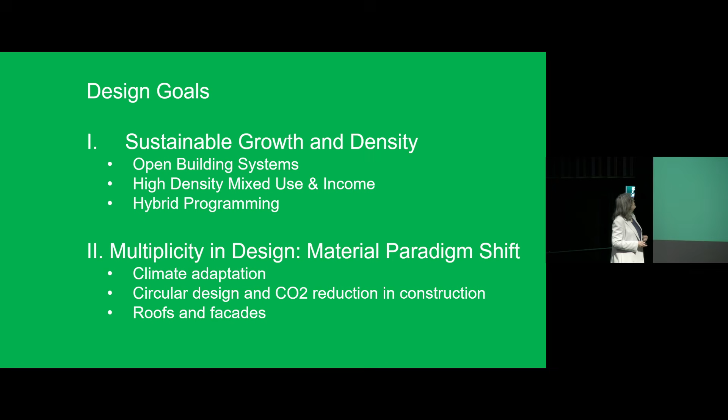When I thought about how to give this lecture, I also have to see what I'm actually talking about. So I hope I have to stay a bit here and see the image as well. I like to make this kind of little bullet point list.

In the beginning of our office, we talked a lot about sustainable growth and density, and how we can play a role in that with our architecture. It was already dealing a lot with numbers and systems, trying to prove that within the same systems, data and parameters, we could do things differently and have a joyful life again as architects, not just following prototypes and economic models. Then we see a shift, which roughly happened about 10 years ago, which also influenced us a lot. So the second part of my talk will be about what it did to the projects we were making after that.

I think one of the most important things for our office, which really started us, is how do we build and how do we densify? Because we knew 30-something years ago when we started our office that we had to deal with this growth and find agreeable ways of densification. And we tried to prove that as much as possible.

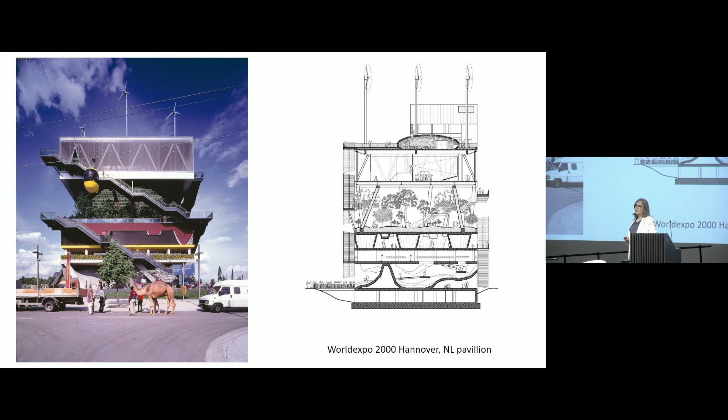It led in the year 2000 to this pavilion for the Netherlands, in which we believed in densifying, we believed in cities, but we also believed we could optimize the use of our lands and buildings much more. So the Netherlands rented a huge plot to build a really huge pavilion at our neighboring, most important economic partner Germany's World Exhibition. And we said, well, we want to prove that we do not use so much land anymore.

We can pile up the land. So we chopped the land into as many floors as this building has—it's actually a representation of the area of the exhibition site of the Dutch pavilion. We put it on top of each other and tried to show it as a kind of cycle, where we said we can raise energy with our buildings, we can collect the water, then the water can come down, and we could start to create forests on the 5th floor, and green our roofs.

Then it can trickle down, and we can recycle the water even further and fertilize our agriculture—there were pots and plants down there, it's even literally showcased here. And then we clean the water we have used again, and it gets pumped up again, and we recycle it again.

Vertical landscapes, just to represent to ourselves that our sprawling country, our ever growing amount of agriculture, but at the same time this demand for more housing and more other activities—it had to find a way, a place. And maybe if we hybridize that, put it together, integrate it with each other, we could do that and wouldn't have battles for area, land and livability. It could be done at the same time, maybe even in our cities and not just on the outside.

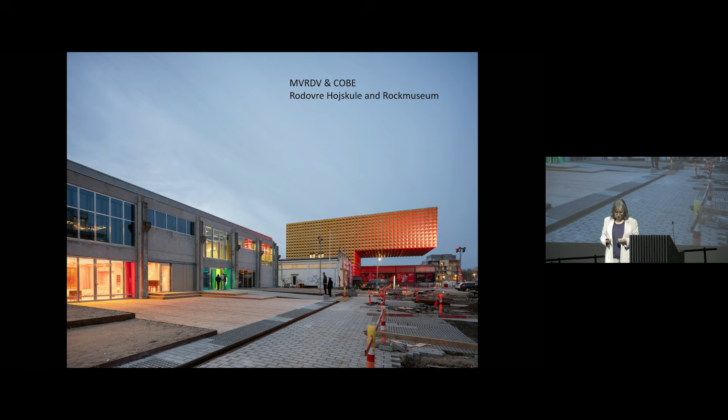And I also call it an open structure, because we also show that you can put all kinds of different things on top of each other if you think about flexible, open and exciting structures. And that is something that most of you who are designing also know already, from when you start to reuse existing buildings, like warehouses, and in this case an old cement factory.

If you do that in a way that you get infills, in a kind of Stewart Brand kind of way, you can also do it in a flexible way, an affordable way, and a way that can be transformed again. So this is learning from renovating, but maybe this open building structure is also one of the ways to go ahead, to make big floors, a way of building that is efficient, that you can reuse again, reimagine again, and find architectural elements and aspects.

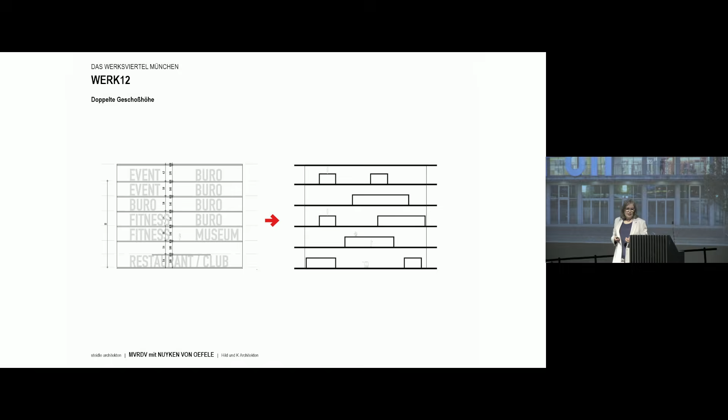It's sometimes mostly interiors, floor heights, infills as we used it, and then they could be fun. In this building in Munich, we even freed up the complete interior from the core, the staircases and the elevators, and put that all on the outside of the building, just to prove that we can have super open and flexible structures.

And then the elements you put in there give the life and the atmosphere and the special feeling to the building, give character to the building as well. And this artist even embraced that by using this sort of comic book, you know, Donald Duck says 'ooh' and 'ah', and he put that all around the building. Wow, which is a great art piece, of course.

So how to make architecture attractive, even if it's in a sort of very bare state, you could say. What can you do to sell that actually and make that popular? And it worked, because it became building of the year in Germany. So Germans love this pop art architecture as well.

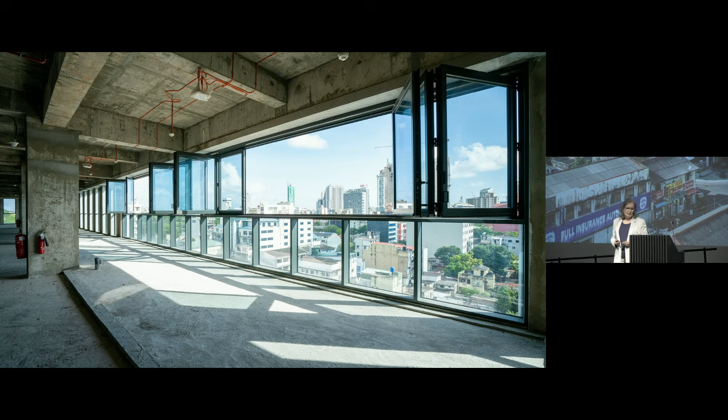So then you suddenly have to transplant your ideas to another culture, to another place. And when I talk about openness, I mean, we all know this is an office building, a commercial office building. That is, what is a commercial office building? It's floors, columns, roof, an interesting facade, and maybe a good lobby.

So there, we started to have the conversation about climate, and I said to him, well, Sri Lanka is famous for its verandas, let's get some openable parts in the building. Like, are you kidding? It's very hot here, I cannot lease these offices if they're not air conditioned. But I managed to mitigate that, and we compromised, and we also have verandas, enclosed parts in the building.

And the second thing that I came across, and in hindsight that was actually very good, he said, well, I want to make the car park above ground, it's much more expensive to make it underground. He made one layer underground, but there was also two upstairs.

And I said, well, cars, who needs cars? Nathalie, we're in Colombo, a lot of people here still have cars, so when I have an office building, I need parking space as well. And again, we agreed to create it, make it higher floors, and pretend on the outside it's already ready to become an office.

I believe that in the meantime, he has indeed already transformed one of these floors into office again. So this idea of the open structure and the open building, you can take it with you to many commissions. This transformability is sometimes something you have to discuss with your clients. But even in the simplest of buildings, it's an attitude.

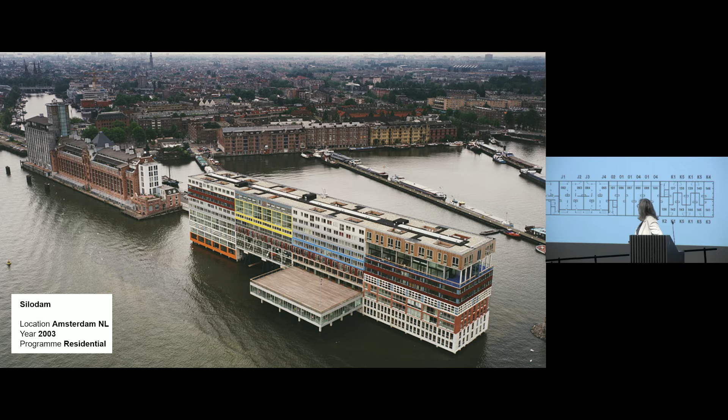Open structures also helped us solve another issue that's coming very contemporary again: mixed income, mixed use buildings for many different types of people with many different backgrounds. How can you do that? We imagined, okay, everybody needs their own type of house. Let's design a very clever structural system with only these walls and two shafts, and the rest can be filled in many different ways with many different floor plans. You can house people who rent an affordable apartment and people who have penthouses, all in the same building. This principle of playing with typology and looking for diversification, even with the same program, is something we continue to do.

We've continued this also in part conversion, part new buildings for housing in the Netherlands, with different types of incomes in one project. I like that a lot. There's a lot of discussion going on about that, and I think that's good. We need a society in which people live together, not segregated. In France, they still do this as well, another project.

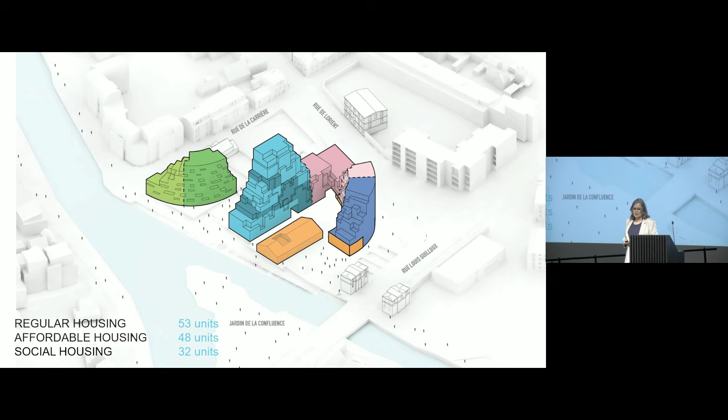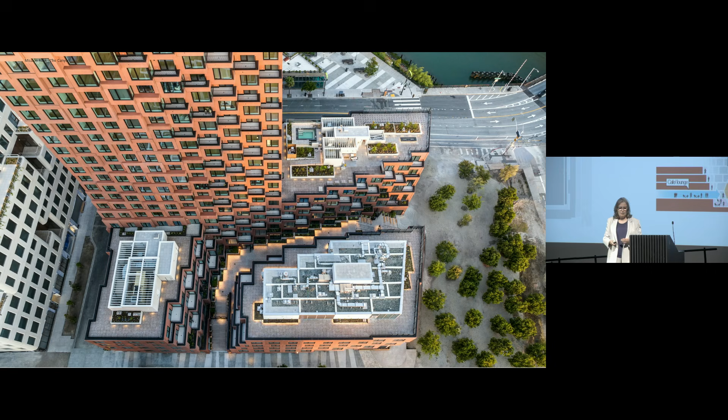And it continues. Now we did it in the States as well, in San Francisco, on a block where we also mix incomes again, including houses for affordables, the red one here. And mixed communities also, mixed use, not just housing, not just offices, but putting it all together, letting public space work, creating semi-public spaces, even if you build a lot of homes, making it accessible through shared facilities. All things we think are important to optimize.

We also see that our buildings start to become fatter, deeper and higher, so more. In the beginning of my career, I was still sort of in control of making a form, a shape, a building. Now I'm filling envelopes to the max, and it's just a bit of fighting back and finding openings.

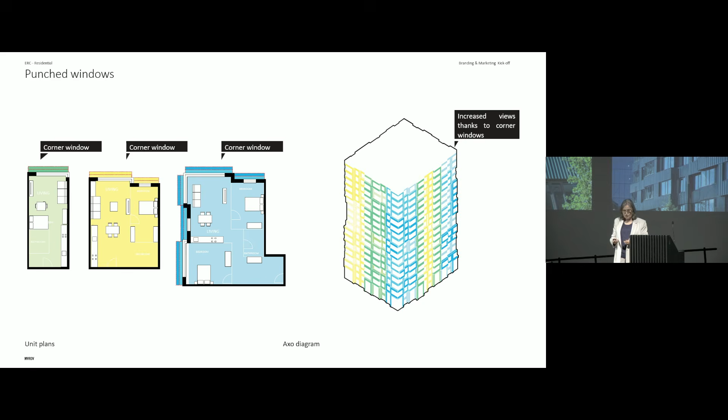But still, I think it's worth it if you can bring in more affordable homes. Here in Boston as well, this is a model with Tishman Speyer, working on an enterprise research campus on lands that belong to Harvard University. In the previous one, it was parking lots of the San Francisco Giants. So you see a societal interest in sustainable densification, socially sustainable densification, figuring out if in a massive form you can make these apartments more interesting by adding corners and edges and making the floor plans attractive. Right up to a recent project we won in New York, which I'm not allowed to show any images of yet. Same sort of half affordable, mid-income, and some more expensive apartments, adding it right into downtown Manhattan. It's happening, and you see city governments everywhere working on it.

Last thing from the early stages is hybridization of program. Now, I'm standing here at an architecture faculty, so I'm talking to you a little bit as if I'm speaking to students, since I'm also teaching at Technical University of Delft. This is also an important aspect. I'm actually teaching public building there, talking about public building, almost everything except housing. I think this is a very important aspect of contemporary buildings: how we deal with functions.

So monofunctionality, monofunctional types, for many different reasons, are more and more disappearing. I think that's also a good thing, because it means buildings can absorb more program, can be used longer, can contribute back to the city they're in. This is a definition I took from this book. So it's not mixed use—it's often confused with mixed use, like many different programs in one building.

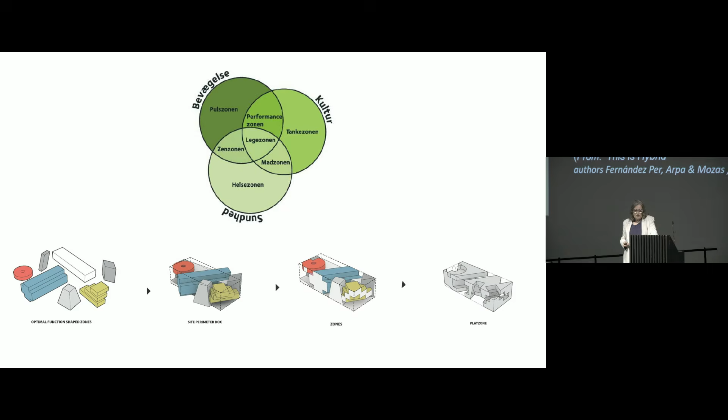No, we're really talking about overlapping functions, new spaces that emerge, things can happen that you might not know could happen. And I think that's an important aspect of contemporary building to take into consideration, especially for public buildings.

This is, for example, a neighborhood center we made in Copenhagen. The Danish said bevægelse, that's movement, kultur, that's obvious, and sundhed, which is health. We want to blend that in one building: healthy body, healthy mind, everything together. Can you make us a building in which all these things can happen, but you also merge and blend?

So we made, just a bit like with the housing, a building with many different rooms and spaces that could house different activities. But just as important as the rooms are also the spaces in between, so they're used for play and fun. As you can see here, there are some children hanging above the lobby. And the building is used day and night, and on the weekend, in different ways and for different groups and different people.

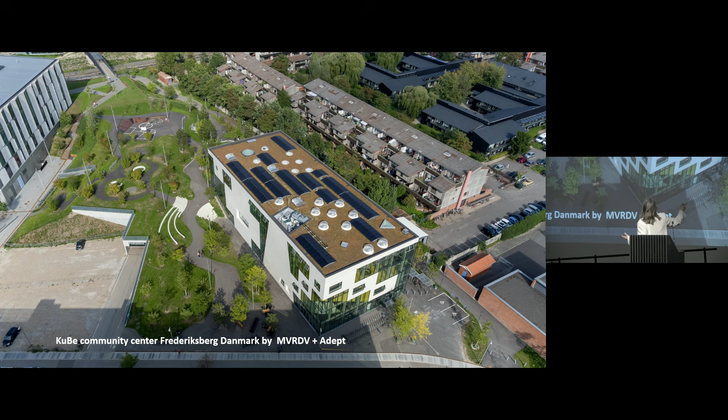It also relates back to the outside and the landscape. So this is a building in which there are a lot of spaces, but none of them are particularly determined. And putting different types of people with different financial backgrounds together in one building is important, especially for neighborhoods that are gentrifying with affordable and new homes. Cities like Copenhagen gentrify super rapidly, so people can see each other and meet and hang out in this building. Whenever you go there, during the day or night, weekend, winter or summer, different things can happen, and it puts all kinds of functions together. You can play there, do your startup office, eat, etc.

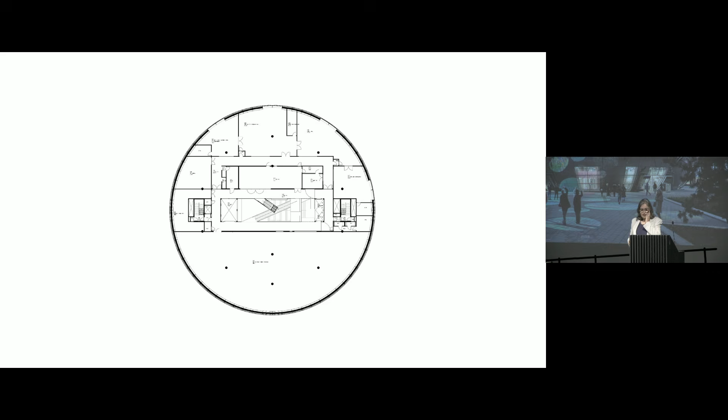Another hybrid is this depot building. It's a depot, but it's also a bit of a museum. In a very small space, in a vertical sense, you can walk through that building and look into the depots, and suddenly you create a situation of exhibition that also showcases what is happening. They are archiving, restoring, making temporary exhibitions. You see the whole culture of your city, in this case owned by the city of Rotterdam, stored in a huge depot, but it's also visible and accessible. Of course, we use the roofs as well.

A building we're going to make here in Toronto is the addition to the medical faculty, a new wing, together with Diamond Schmitt, Two Row Architects, and landscape architect Michael Van Valkenburgh. It's also something that represents a change in faculty and university buildings. Now, a medical faculty extension is quite particular—it has a lot of laboratory spaces, and arts and science spaces are in here as well. But we also wanted to add much more publicly accessible spaces at the lower levels, not just for us, but for the university as well.

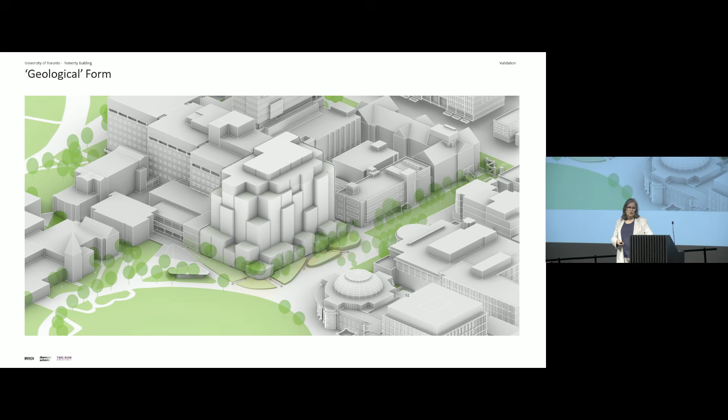University buildings—and it's super good to see this happening here tonight—you can expand the thinking about that. What if the plinth and the lower levels of university buildings stay accessible for students in the evening? Maybe events are happening there. That's a different use of the building than just standing there closed. Also in the daytime, I think students like to hang around more at universities, go to the libraries, don't want to stay in their rooms, want to meet each other, or be in a space where you're not tempted to use your phone all the time. Universities and schools are opening up.

So this is what we try to do here. That means we had big discussions with each other about the amount of accessible, semi-accessible, and semi-open areas. We learned from excursions in the Netherlands, and we know there are fantastic examples in Australia as well—there's a transformation of university buildings going on.

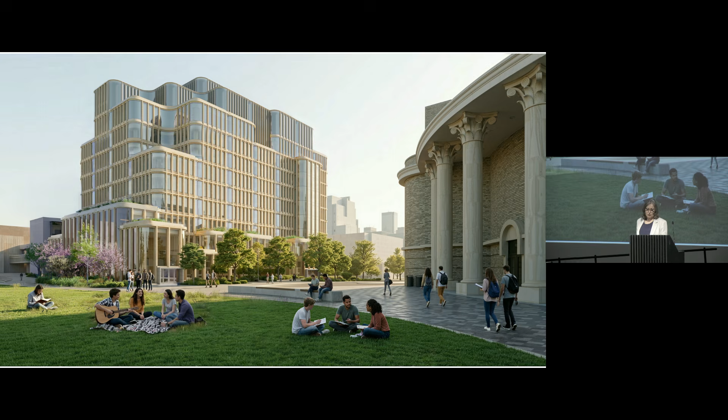In the Netherlands, probably not for medical faculties, but we don't even build single faculties anymore—we just build multi-user, multi-faculty buildings. It's also about efficiency of usage of spaces, but what is an architectural community? This definition is changing, and it will also be a place where the convocation takes place. It's also a space that we make in very close collaboration with Two Row Architects, to get the references there as well.

Which is also very nice here in Canada, to be able to indeed think in a more holistic way. And meeting each other is important as well. So here are the only images that I can show you so far, working on it, in progress.

Second part of my talk, and I have to talk even faster, is the after 2015-16 period. You could say our office started in the 90s. We were getting slightly cynical in those days. It was a time of neoliberalism, ultra-economization of our buildings. It was kind of boring as well, sprawling, highway office buildings emerging, big malls everywhere.

And slowly, especially after the 2008 crisis, you saw a bit of a shift, a loss of trust in globalization, as it were. So what are the true intentions there? Sanne will talk much more about that.

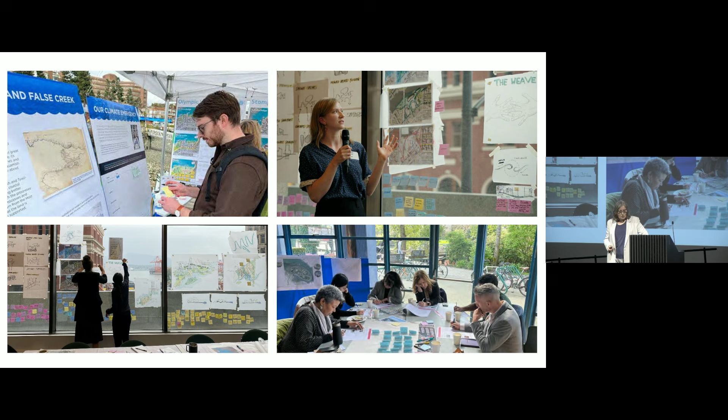I think in Vancouver they started a very clever process of talking to the community, talking also with a lot of involvement of First Nations, people who originally lived on these lands, to see what we can do to live with this effect. And so we started to think in gradients, advice on slow transformation and adaptation of buildings.

So interesting again in regard to carbon: if we don't like something, do we demolish it, or can we adapt it? Can we adapt to climate change? Can we transform existing buildings? And how far should we go?

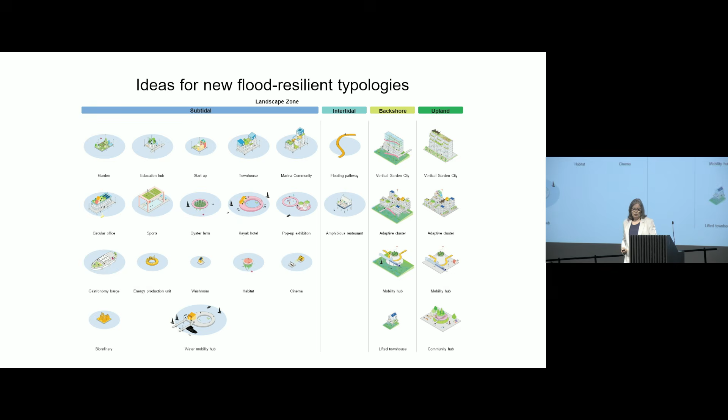How much money should we still invest in places that we know will not be sustained in times of rising water levels, which are up and coming? So how can we maybe create completely new typologies? On the one hand you have to withdraw and maybe transform buildings, but on the other hand you can also add stuff again, stuff that lives with water and with the tides.

And then, what we always like to do is offer options. That's a magical word in our office, and I think it's good that we have options. So we don't believe so much in the architect who says this is right and this is wrong.

But we do believe in saying, well, what if we imagine that our coastal areas are zones with different tidal conditions, and that we adapt the way we build to those zones? And that we also have to learn over time how this will develop, maybe things go faster and maybe a bit slower. But we can get on this path.

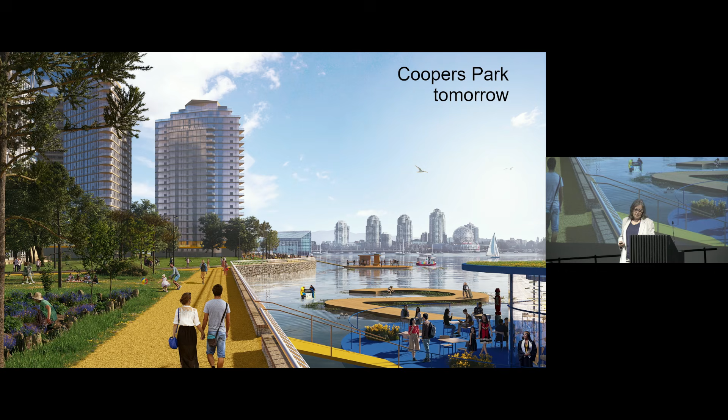First of all, there's recognition that these things are happening. We can start to protect the things that are already under threat, and from that learn, and then take an adaptation pathway in climate design. So you see here how, slowly but surely, shorelines will transform.

It's important as architects that we can use our tools, like drawing, thinking of new typologies, imagining new imagery, to help take those steps forward. Secondly, we've also started to experiment with different ways of constructing.

Everybody knows this thing called a completely circular building, as in completely demountable again. We actually managed to make one of these buildings. We always say this is one of these concepts that's around there—it's a way maybe to go forward.

In this case, the owner of the site said, 'I'm only having a lease for 40 years, so make me a building that I can take apart again.' In the Netherlands, there's a registry system for building materials called Madaster, officially, where people can start to add all the information about what they've put into a building, right up until the last screw. And if you want to reuse it, it also has to be made completely demountable.

So it's a way to make circular buildings possible, because otherwise it's not really useful—in 30 years you'd have no clue anymore what got in there. This building is a science building on the campus in Amsterdam, with labs and startups, and it's also bicycle storage, a meeting place, a social space. Like in the buildings we're making here in Toronto, it has this double bill of getting the university and research community and starting businesses together.

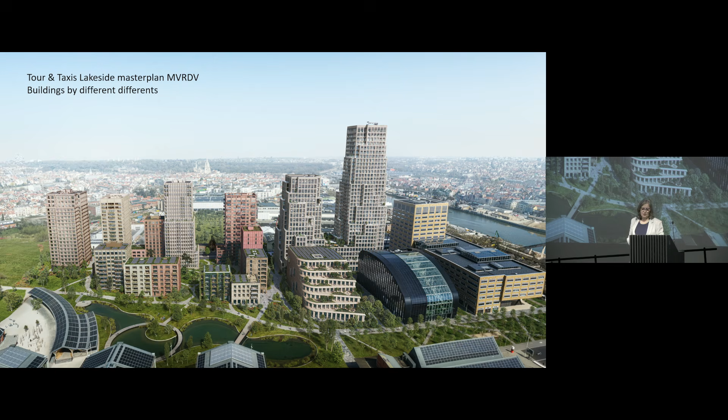We also started to continue our pathway of urban densification with different types of buildings, with different architects in a master plan. Like I said, the buildings get bigger and taller. This is next to the North Station of Brussels, and we made two of the towers—we are also the architects of.

This is the moment when we actually started to apply some of our new ideas and developments that Sanne also talked about, because we started to think about what if we make the construction different—what if it's a housing and an office tower? What if we really apply our ideas about carbon, knowing that as a building industry and as architects we're the biggest emitters of carbon? What is the impact of that on all these tall buildings we're making?

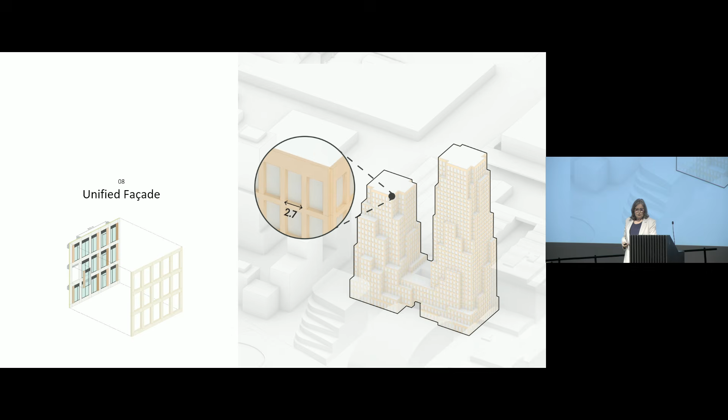Of course we also said they have to be transformable again—you recognize a certain modularity. The offices could be turned into homes as well, and the floor plans of the homes might be changeable. The elevations were designed so that you can take out frames and replace them with other ones, because they might have to be taken out sooner than the rest of the building.

We started to have a discussion with the client on the materials for the facade—the nature, the weight, the use of carbon there—and we ended up not with natural stone, but a composite material, which also weighed less, so that had an impact on the building.

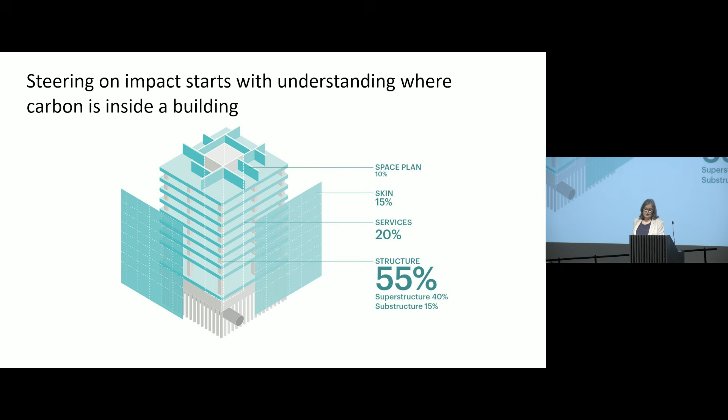But we also started to talk about structure, because we know now that the structure is one of the biggest heavy hitters in producing carbon in architecture. If you can change something in the structure, you can fundamentally change something in the carbon emission—your building becomes lighter. Same happens, of course, if you have different facade materials.

We managed to make the office part of the building in a hybrid structural system. So in this left tower, instead of concrete floors, we gave it wooden CLT floors, and therefore the building can be much lighter.

The housing tower could be constructed in the same way, except we discovered that with mixed income, according to Belgian regulations, it would have to be completely sprinklered, and that made the building start to become too expensive, and the houses would become too expensive too.

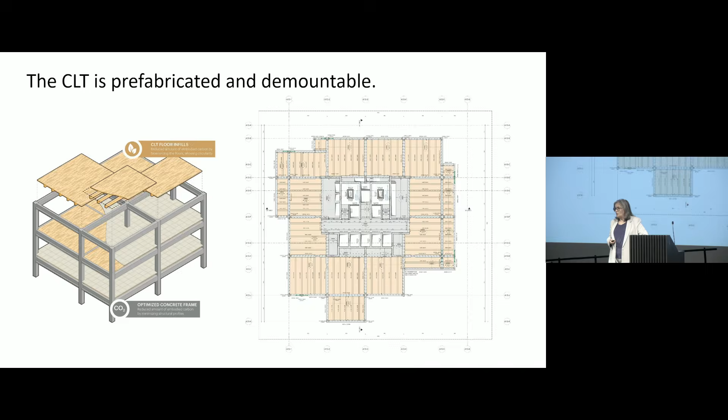But we're on it, so we now start to imagine this new way—we have these demountable buildings, now we have these hybrid structures coming up, these facades that can be interchanged, these new images of the building of the future.

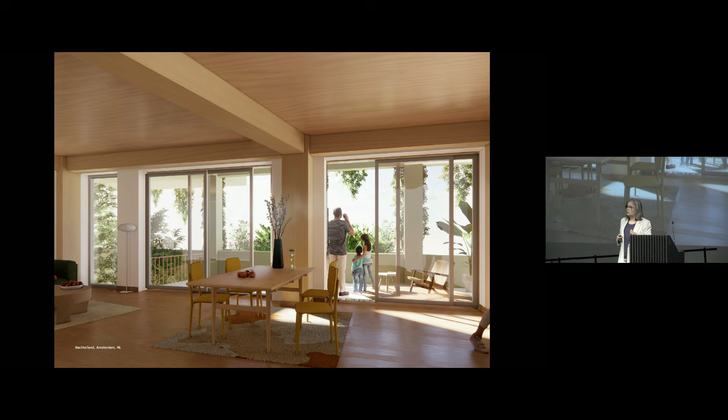Amsterdam has made a pledge to become a more circular city, and is now asking developers to really make fully wooden tall buildings as well. So we can now actually start to find out what that means if we build wooden housing towers.

Same for efficiencies of roofs and facades—we promote usage of roofs through manifestations again, like in 2000. Now in Rotterdam, every year people move up to rooftops and understand there's a fifth facade. No, it's not a fifth facade, it's an extra floor, and you can do many things with that.

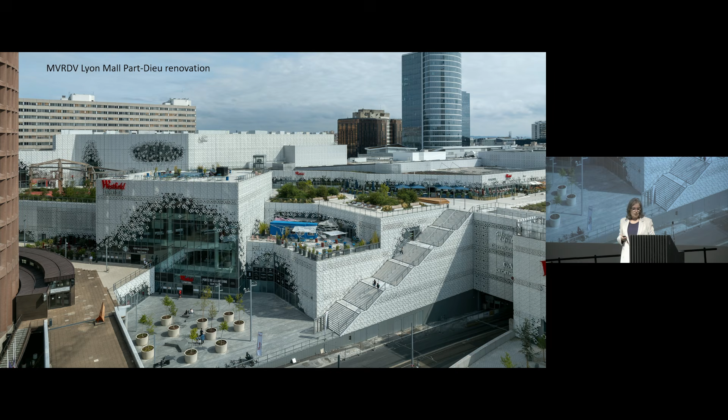You can also discover there are existing roofs that you could reuse, like car park roofs on malls. And what if you give daylight to a mall? Whoa, that suddenly connects with the context as well.

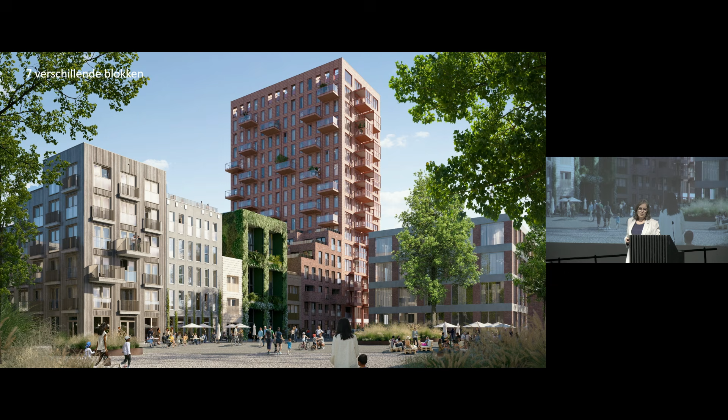And again, the catalog to inspire and come up with own ideas. Experiments with facades as well, bio-based materials. Is that good? We don't know, but we're trying. No, it's really exciting. So a built laboratory, you could say, where we make nature-inclusive facades.

Different typologies of housing in here, green roofs, solar panels on the roofs, and it's under construction now. We reuse wood, we have bio-based materials, recycled concrete, recycled tiles and bricks, and rammed earth facade. You name it, we've got it in this project, and we're gonna try it all.

And Amsterdam is doing that. And then, if you have a facade, why not harvest your energy, not just on your rooftop, but do it in facades as well, which we will do here.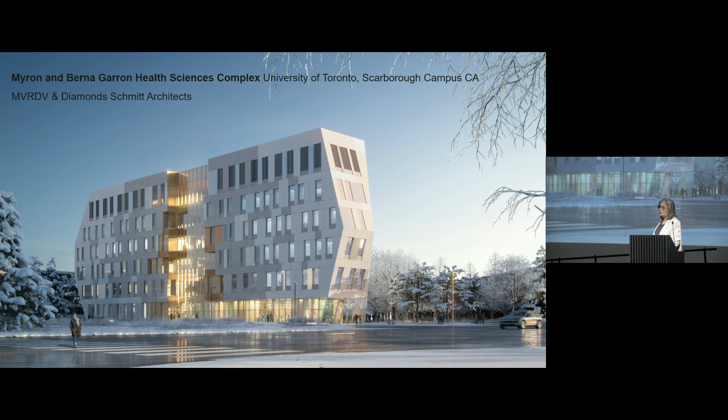It's all what I call multiplicity in design. Multiplicity meaning it's not just a facade, you can do extra things with it. It's not just a roof, there's more about it. It's not just a program, you can hybridize it. It's not just a structure, but it can be used in the future as well.

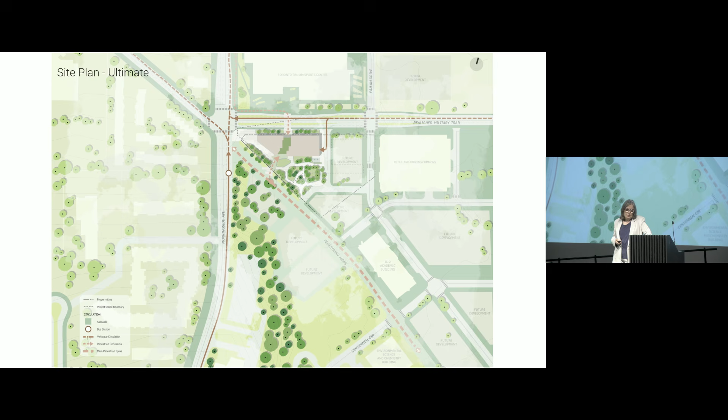And so this building also has this sort of double, triple idea. The idea that it's a good building for science and research, it's a good building for students, but it's also a building in which we will try to revive the neighborhood, the neighboring ravines, and take that feeling back into the building, make places where people can meet. It's also an area underserved with medical services, so what the students are doing, also local community can use medical facilities in the building, which is also, I think, a super double use.

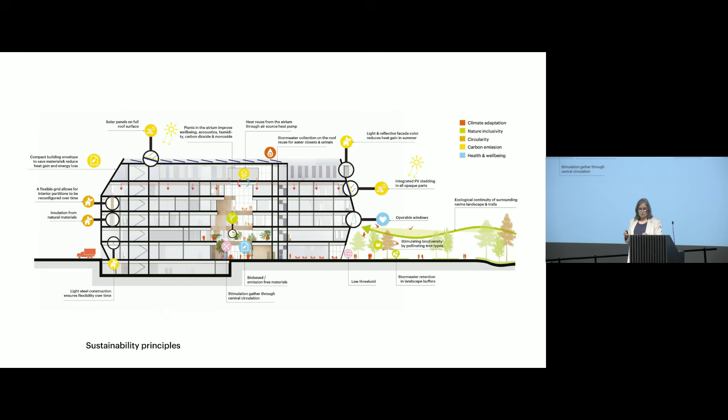This type of drawings, Sanne will talk about more, but let's say with the solar facade, the atrium, and the green, and all the things we try to do as best as we can. It's an interesting discussion always with client, because basically these type of spaces, they exist and they don't exist in the program. They're called corridors. But you can also do other stuff with those places.

So here we are, and here we were, and here we are doing things, but now we want to take other steps, and this is why we are here, to talk to you about our carbon confessions. So a couple of years ago, I talked with Sanne about, yeah, we try to do our best. We don't always understand exactly what it is we're doing. We don't always understand these labels that we're trying to get to our buildings. We don't always understand how we can convince our clients to take an extra step or not turn back measurements which we think are necessary.

We do know a lot about digital design. We know how to work with parameters. But this sustainable thing, why don't we get that somehow under control? And then Sanne and her team took on that challenge. Sanne, I'm giving the floor to you. Sanne is one of our directors, and she's leading the research group of our office, MVRDV.

Thank you, Sanne. Oh, almost made it. Thank you, Nathalie. I'm just going to reorganize the stage a bit so I can move around.

Thanks, Nathalie. Super nice to be here tonight, and fantastic that you're here with so many people to listen to my part of the story. I'll be quick, and I'm going to talk about our journey through the world of sustainability. As Nathalie just explained, 5 years ago she approached me and said, Sanne, this sustainability, how can we approach this? How can we make it more specific, more explicit? How can we become sustainable?

As Nathalie said, I'm the Director of Research and Innovation at MVRDV, and I think I have the coolest job in the entire office, because I get to ask these questions about what is sustainability, because it's a very broad term, it could mean a lot of different things. I'm going to talk about our deep dive that we've done in the past 5 years of the history of MVRDV. We always have been very invested in sustainability.

We had social sustainability, we were busy with densification, and we said we want to be 100% sustainable. But we didn't know what that meant. So we became vegetarians, we had an LGBTQIA+ network, and a women's network, and we were recycling our coffee grounds and counting our printing paper. We thought we do everything we can to be sustainable. But at the same time, we were also working with recycling things, right? That's something you always think about when you talk about sustainability.

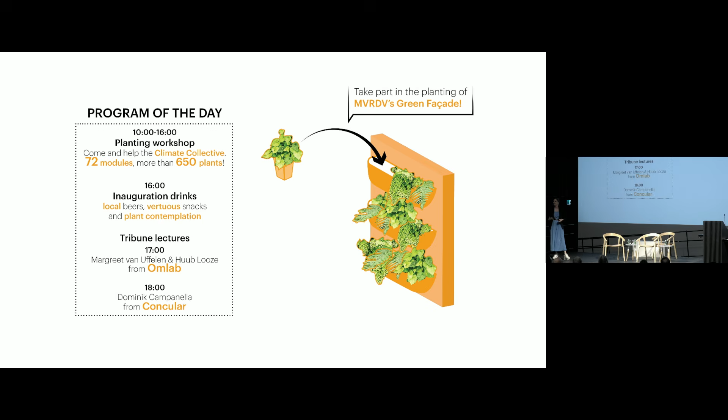We even hired sustainability consultants that told us to work with the United Nations SDGs. I don't know if you guys know this? And I found it very difficult to work with these things because they're made for countries, not for architects. And what do you do then? You have to use the SDGs, but how? Don't know.

We also got the feeling that, is this it? Putting these icons and telling ourselves that we have a heat pump and solar panels, and it's inclusive, and we have a gender-neutral toilet. But at the same time, we were still building and designing like this, business as usual.

And this is why we have this exhibition here. It's a very honest exhibition because it's about, you know, sustainability is also very much marketing and branding, and it became a business in a way. And what we are doing here is we are sharing what we did in the past and what our insights are. And we started to look at ourselves critically.

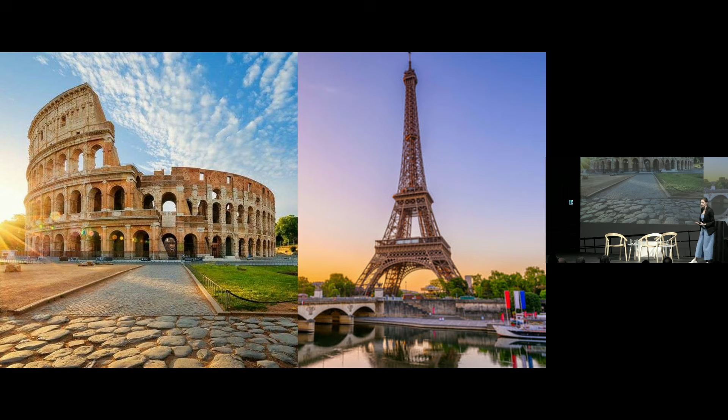And we looked at Rome and Paris, two lovely cities, and they both give us a very clear warning. The Club of Rome told us 50 years ago that our current behavior is not sustainable. And in 2015, we had the Paris Agreement, signed by 196 member states to limit global warming to maximum 2 degrees. And yet 2024 was the hottest year ever since we started measuring. And the author of the Paris Agreement, Christiana Figueres, actually calls our current course suicidal.

And we as the building industry are responsible for 39% of greenhouse gas emissions. So we are a very dirty industry, and we realize that we are part of the problem, and we want to become part of the solution.

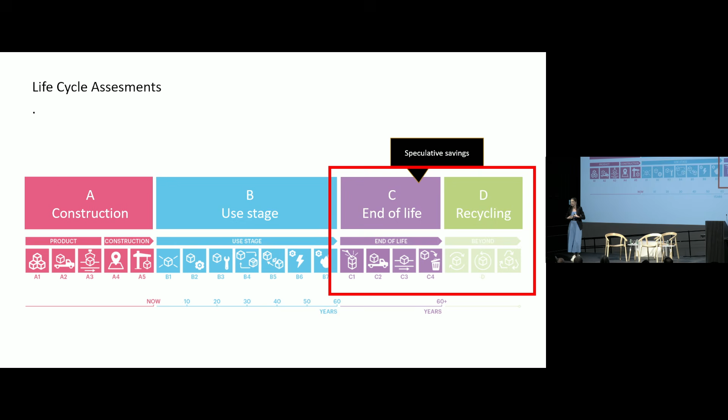And a lot of these discussions about sustainability are very much about circularity, the circular economy, and the carbon CO2 emissions. They come in modules, they come in compartments. And what you see here is actually carbon over time. All these stories about recycling and circularity, they're in the future. Somewhere in the future, someone might reuse something, or when we have our demountable building, when it's time to demount it, I'm dead, and I have no idea if the next generation understands what they can do with it. So this is very speculative.

A lot of discussions about net zero are about energy. And of course, energy is also very important. Buildings consume energy. But what discussions are very little about is embodied carbon, which is the carbon that's locked up in the materials, the concrete, the cement, the steel, and the fuels we burn to produce those.

And that's why we at MVRDV decided to focus on what we can control, what our sphere of influence is, and that is what we design and draw every day, and that's embodied carbon. That's where our biggest influence lies.

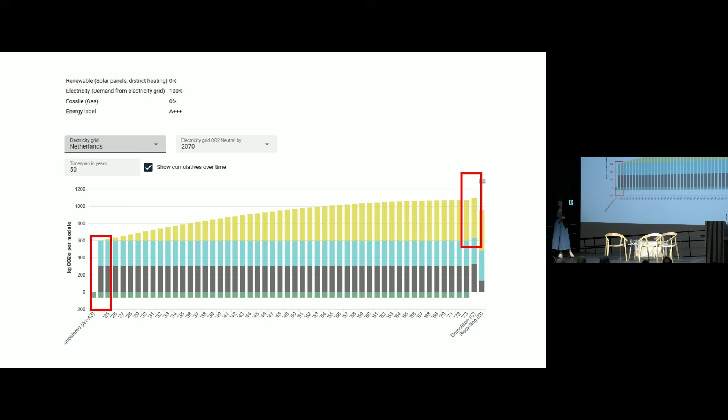Of course, energy is important, and I always show this diagram to explain it. This shows the carbon emissions of a typical residential building in the Netherlands over 50 years. On the right-hand side, you see that red rectangle. That is the amount of carbon this building has emitted over its entire lifetime in heating, cooling, appliances. On the left-hand side, you see a rectangle more or less the same size. That's all the carbon that's emitted before you have the key to the building.

So this shows the enormous impact of the embodied carbon in buildings. To illustrate it even more, I talk to people that are ashamed of flying, don't dare to fly anymore, but one square meter of new business-as-usual construction equals my flight here from the Netherlands.

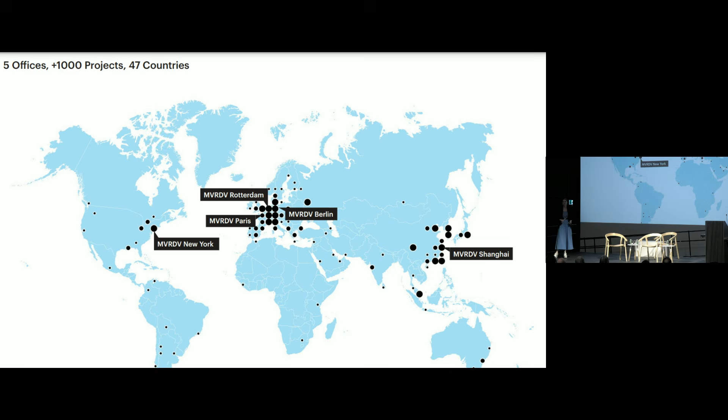So it puts things in perspective, and it shows that we can have a massive impact if we get it right. And the embodied carbon discourse, we found it quite complicated when we first started to look into it. And why is it complicated? Well, we work all over the world, which is fantastic, because we get to see practices, rules, regulations in all different countries.

We have different ways of measuring in different countries. Some countries measure things over 50 years or 75 years, or they only look at energy, or they look at the whole life carbon. So that makes any kind of comparison between buildings in different countries very challenging.

So that shows that we're comparing apples with oranges. And you can't really look at any number of a building without knowing what is included in this number, what's the method, what is this made of.

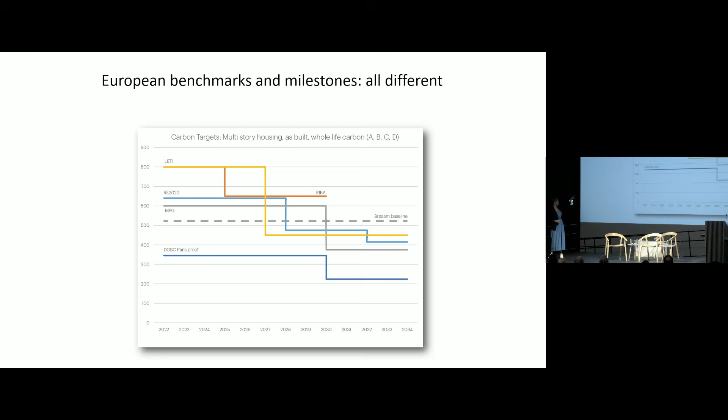To make it even more complicated, these are just some benchmarks, milestones, targets from different countries in Europe when it comes to their, let's say, Paris Agreement targets. So we have the LETI from the UK, the RIBA Climate Challenge, we have the French with the RE 2020, we have some BREEAM, we have some Dutch things in there, and it shows that everything is different, even the tipping point.

So what is the common language? What is the common denominator? And what are we aiming for? Also, I thought Europe is kind of a patchwork, but also in the US, things are widely dispersed, and it's very difficult to find any kind of consistency in this.

Then, whenever I'm at conferences or universities specifically, people love talking about data. And these discussions can get very confusing. At a certain point, I was sitting and listening to something, and then I thought, we just love talking about data.

But to illustrate this, people always ask me, what kind of database should we use? Because one database is different from the other. And this is completely true. There's many different environmental databases in the world, and none of them are complete. They're all structured differently. Some or most of these are behind paywalls or linked to software.

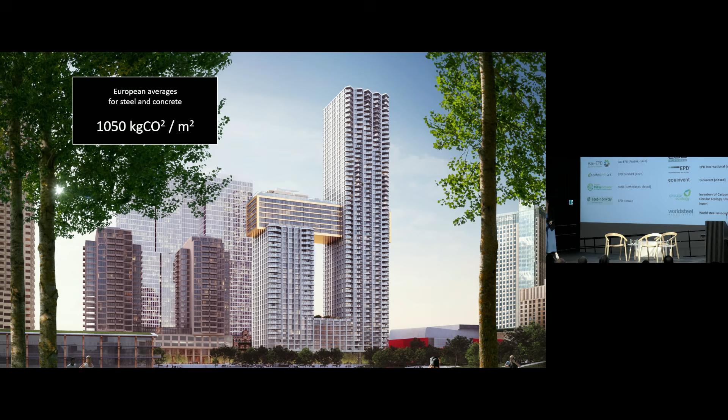So we're kind of selling numbers to try and solve the climate crisis with numbers, like if numbers are going to reduce our emissions. Just an example, if this is a building that we have currently under construction, the largest residential building in the Netherlands. If I use database number 1, my carbon emissions are at 1,000 kilos of carbon per square meter, but I just use a different database. I don't change anything about my building, and then look, I win the Very Sustainable Award because I just found some better numbers. And this is how people think.

This is actually happening in the discourse. I just look for a better database, and then I have a good number, and then I'm super sustainable. So we're fooling ourselves.

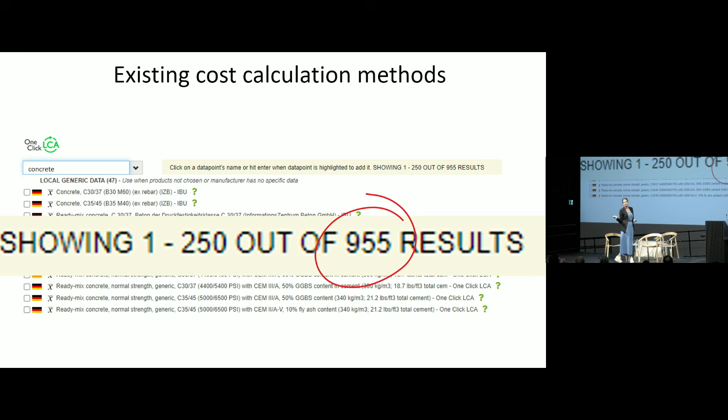This database has like 1,000 concretes. If I'm an architect doing a competition in China or wherever, I don't know what kind of cement I'm going to use. That's why this is really not meant to design with. How do you design with this? I can't. So that's why we said we need less data, not more.

The last reason it's complicated is the current methods to do something with embodied carbon. How many of you have ever done an embodied carbon calculation? Oh yeah, I know you. That's quite a lot, good for you. Fantastic, respect. Did you enjoy the experience? Was it useful?

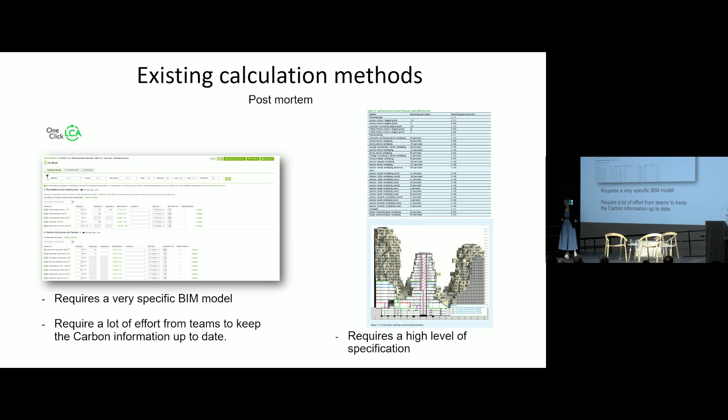What we see is that if you have to do an embodied carbon calculation, you actually need to have quite a lot of information with current methods. For example, One Click LCA, you need a lot of information before you can say anything. So all the decisions have been made, you're out of time, you're out of money, and then you get a number. But you can't really trace this number back, so what can you do with it? It's kind of too late. We can't really steer or design with these things.

So it's complicated. We have data confusion, different rules and regulations, we're comparing apples with oranges, and information comes too late. So that's where we said, can we please simplify this? We need something that gives us the ability to say something about embodied carbon from day one of the process. We need something that is not a calculator. We need something that helps us design with embodied carbon based on a napkin sketch.

So this was our big challenge that we started 5 years ago. Let's make a tool, a version 1. This was our first wild experiment, so we started with an Excel tool. It kind of worked, but it was very unexciting and also difficult to share. It did something, but it didn't do what we wanted.

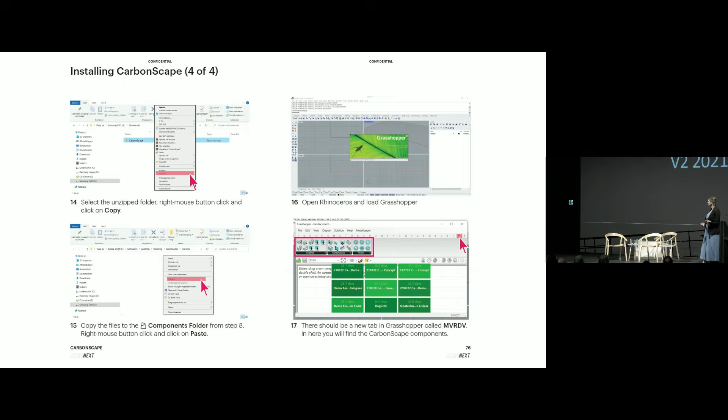So then we said, let's make another tool, and we actually made an entire Grasshopper plugin, completely made all of it. And then we said, okay, now we can finally start to design with it. So we had working on different options and shapes in Rhino with this tool, and looking at what is the difference between these things. Then we were super disappointed because these options were all different, but the results were kind of all the same. And then we thought, oh Lord, so what are we doing wrong?

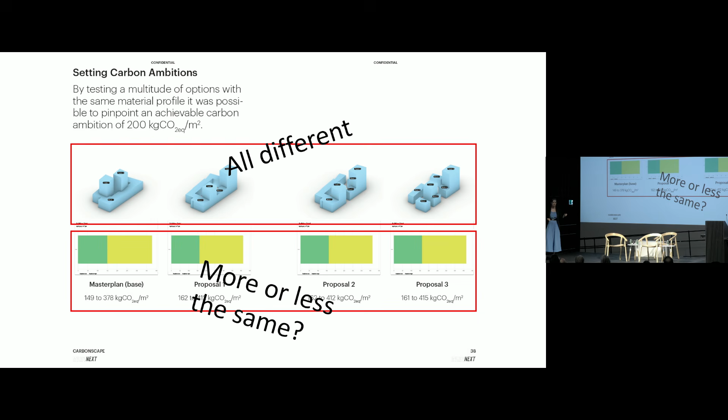But it makes sense. These are all the same amount of square meters. They kind of use the same amounts of material, so the differences were minor. That gave us the insight that it's not so much about the form that we should look at, but about how it's made and what it's made of. Meaning we need to get more control over that detail, that layer. And we couldn't do that in this plugin.

So there we went. Let's make a platform, something that's online, something software agnostic, something that everybody can use, something that enables my mom to make a carbon calculation, maybe even enjoy it. And that is Carbonscape, that's the tool that we developed. It is online, and you can all access this for free. We'll share the link at the end of the presentation as well.

We have the software platform, and we also have a tutorial online, so we hope to get you all carbonscaping. Because honestly, most people think carbon is quite a boring subject, but I completely fell in love with it, and it's fascinating. So it's an online tool. It looks like this.

It's a quantitative approach. So how this works is you collect quantities from your building. How many floors above ground, floors below ground? What's the height? How many square meters of facade you have? Open, closed, basic quantities.

And once you have those, you can start to see how this behaves. You can start to play with options. What does this building do if it's a complete timber building? What happens if I only do the floors in timber? What if I do clunky business as usual? Or what if I try to do some kind of lightweight concrete structure? It shows the differences. And of course, you can add options and scenarios here, but this shows how you can start to look at building systems and variations within. So you have control over how you make it and what you make it of.

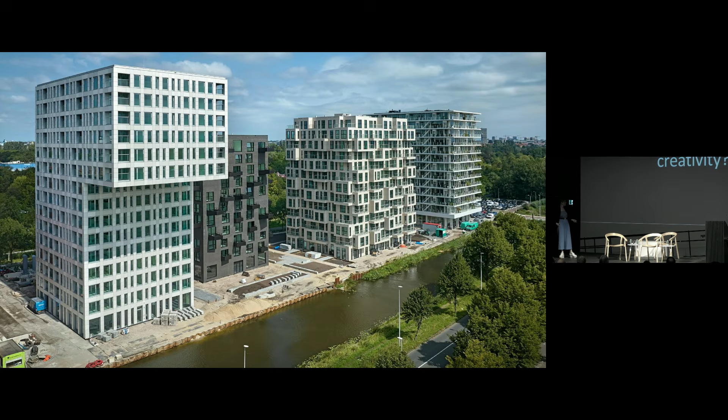When we started our journey, we were honestly a bit afraid because, as you've seen in Nathalie's presentation, we do pretty wild architecture, and we like that. We thought maybe this is the end of creativity, and maybe we can only make boring boxes. To test that, since we developed this tool, we looked at this residential building with a cantilever, and we thought, let's see how bad this cantilever is. Let's see what the impact is.

So we took this building, completely took it apart, and calculated the carbon impact of this building. Then we actually cut off this cantilever, put it on top, and just saw what that did. And somehow the difference was 3%, which is not a big drama. And then we thought, okay, 3%.

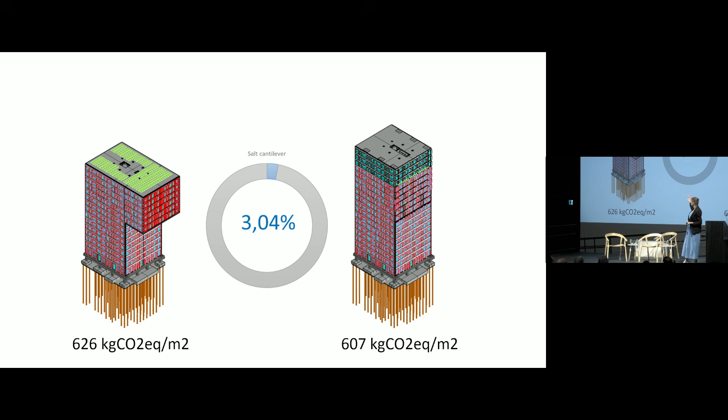Maybe designing with carbon is like designing with money. You have one bag of money, and you will spend a bit more money on this cantilever, and you have one bag of carbon that you can spend once. And that means if you spend 3% on that, you need to save 3% elsewhere.

And we did this for one cantilever, so we thought, let's do it for 100 cantilevers. So then we went to this building in Amsterdam and did the same exercise. Here is the original building, and we compared it to this shoebox next to it. What's the difference between something that looks very expressive and 3 boring boxes on a podium? And again, it was 3%.

And we did this 150 times, and somehow it's always 3%. We had all these things verified with engineers, and it gave us this insight: it's about understanding how to work with budgets within your building and how to balance and spend your carbon.

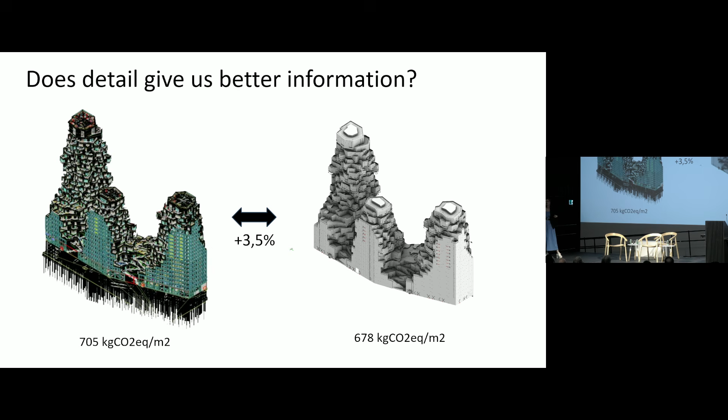So we started to look for more impact—where is the actual impact? Where are the heavy hitters? Some people think you need a lot of information, all the screws and nails and door handles. So we compared an execution model to a sketch model. The difference was 3.5%, so you can already say meaningful things about the carbon behavior of your project based on a sketch. You don't need all that information.

Putting green on buildings—is this a big drama? In this case, we have lightweight planters on the slab edge. Nothing extra has been made, and the impact of the planters is less than 1%.

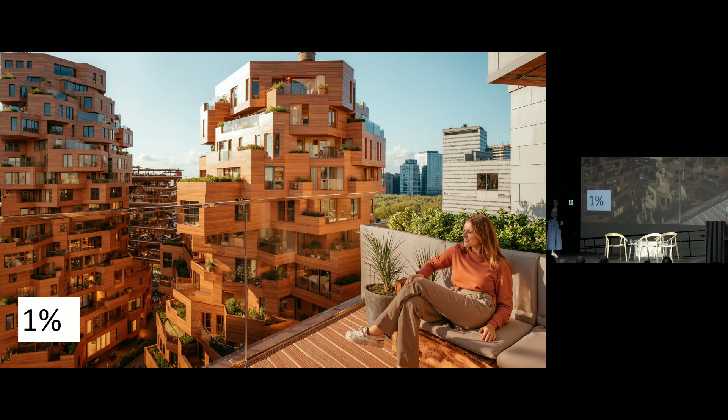Then we started to look at facade cladding. Is that bad? This is all natural stone—what's the carbon impact of that? So we replaced all of the natural stone with timber. It's a 1% difference. Even if you make the whole thing out of straw, still the difference is only 1%.

And so this was our search for impact. Search for where should we look. How can we steer impactfully?

This is one of my favorite parts because people love talking about transportation of materials. We went through 150 of our own buildings, from the foundation piles to the building maintenance units, the facade details, the floors—everything. By this time we know pretty well how much everything weighs in a building, and we also know the carbon emissions of a truck, a train, and an ocean carrier. So we calculated that if we want to transport this entire building from Amsterdam to Rotterdam by truck, it's 2% of the carbon emissions—and that's transporting the entire building, which of course nobody will ever do.

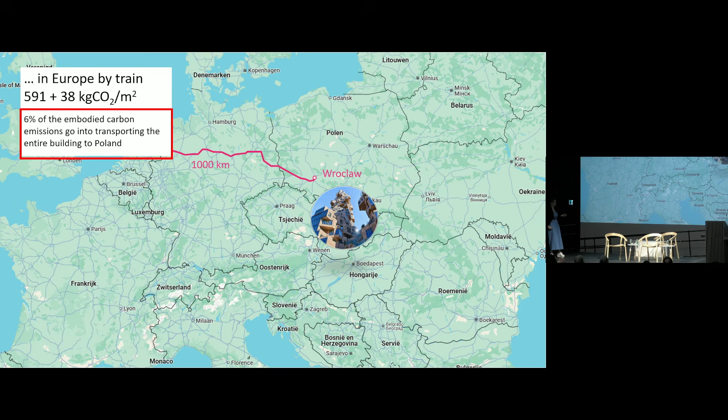If we put the entire building on a train to Poland, 1,000 kilometers, then still it's 6% of the emissions. So it's not where the big impact is.

This building is a built project in New York—a hotel. It has the colors of the neighborhood and very colorful glazed bricks. We couldn't find this brick in this quality in the United States, so these bricks come from Spain. I was fascinated by the fact that whenever I show this project and we talk about it, people always say, 'ooh, these bricks come from Spain, this is very unsustainable.' So we calculated it.

How unsustainable is this? We know the amount of bricks, the tons of bricks we had to transport, and the emissions of an ocean carrier, and it is 0.2% of the impact, but 95% of the discussions.

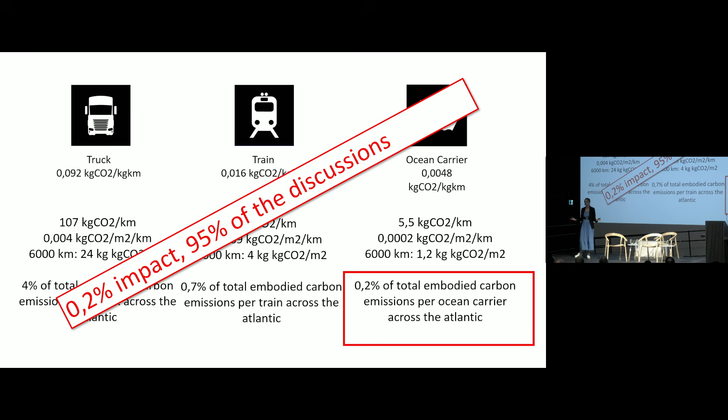I love this because it shows that we don't have a calculation problem, we have a focus problem, because we don't know where to look. And by now we do know where to look, so this is part of the exercise.

This is my hobby, going through 150 of our own projects. These are all actual projects, they just have code names. And we learned a lot from this.

You can see the world map right there, and this is constantly growing. This is live in our office. And yeah, we can see a couple of interesting things.

For example, Europe has relatively the lowest carbon footprint. Understandable, our buildings are smaller, we have EU climate law. We can see that Asia is actually the most concrete heavy, because that's also the way of building there.

And the most interesting thing is we started to understand where our biggest impact lies, which is in structure. Nathalie already showed it. The biggest impact is in everything that is concrete: foundations, basements, floors, cores, beams, columns. That's where the biggest impact lies.

And that's typically not where we look, because we like to talk about things that we see, like shape, materials, transportation. But the true impact is in the invisible.

For example, parking, parking, parking. So can we do less parking? Can we do less undergrounds? We look at that. And as Nathalie showed, if we're doing parking above ground, you can in the future maybe transform it. Also, this project has above ground parking. Or maybe we can just look at how we can use less parking.

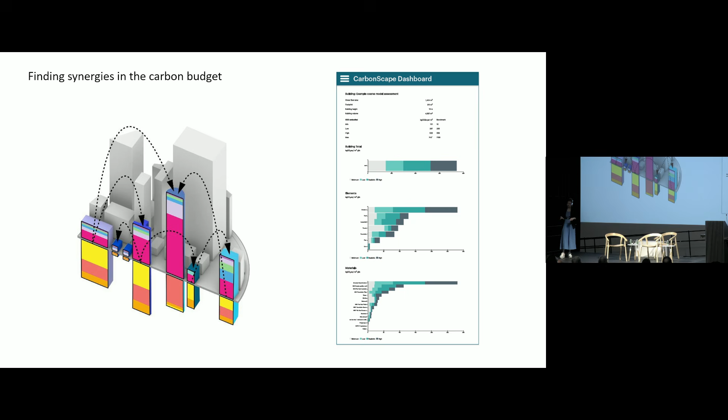And it kind of works the same. It works with one budget. You have one master plan budget, you can spend it once. And here we started to create synergies, so you know where your heavy hitters are. So you know you need to tread lightly around that and compensate the behavior of the heavy hitters with timber, lightweight, bio-based transformations.

So we were looking for obvious correlations in the behavior of carbon, so we might even be able to skip all of the calculations and the data altogether. And yeah, we asked ourselves, are our big projects always carbon heavy? Well, as you can see, this is kind of Jackson Pollock, it's all over the place. We couldn't find any correlations.

Is our tall buildings necessarily carbon intensive? Also not. We have some lightweight tall buildings and actually some very clunky low-rise buildings.

And then we found this, hallelujah, this undeniable correlation between the weight of your building and the embodied carbon emissions of your building. So, Cedric Price, how much does your building weigh? We know exactly how heavy we are. And it makes sense if you think about it - this is just the amount of material that's in your building. And if you just try to use less material, then it's a very easy win.

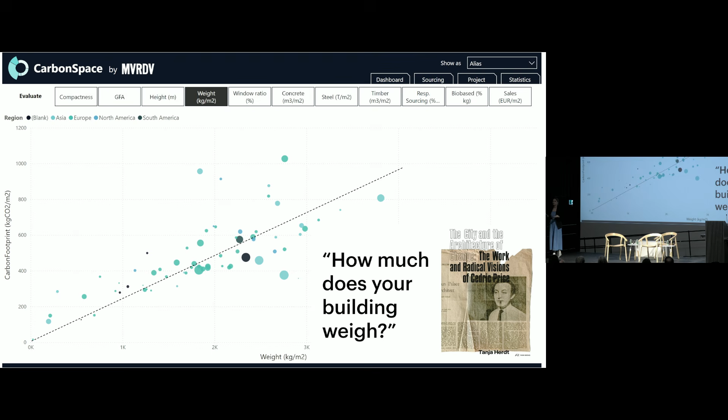And this is something that everybody can use. You don't need software for this, you don't need tools for this. It's just about trying to use less material and build lighter.

And how we are doing that - so we are on a weight loss journey ourselves. As Nathalie called it today, we're cutting the carbs.

And yeah, we are on a weight loss journey, and how we lose weight is completely different per country, per project even. So here in Paris, we have our first mass timber housing project on top of an existing mall. As Nathalie showed, we are now developing our first timber tower, 70 meters tall, mass timber.

And because of all of our work in the field of carbon, we met these guys, the Zen mindfulness Buddhists of Plum Village, and these guys are now our clients. The sisters live in the sister village, and they were homeless - their house burned down - and they asked us to realize something for them that is extremely sensitive with nature, very ecological, and that's what we did. They didn't have any internet or electricity, a very special collaboration, so we kind of lived in that village for months, and we developed for them a nunnery where 90 nuns will live in straw bale.

And I'm super excited to share that this is what it looks like. And if you think of MVRDV, then you would definitely not think of this as an MVRDV.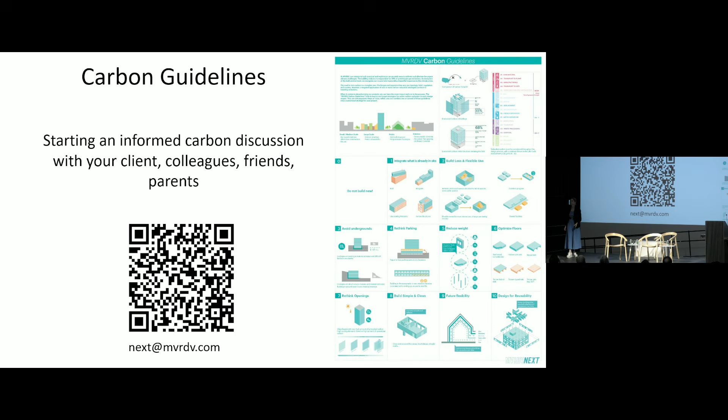We share our insights and learnings with all of you, but also inside the office we try to get more attention and encourage the discourse. So we made this poster with carbon guidelines, and it's everywhere in our office, in all the different studios, next to the coffee machine. When I first mounted these posters, our PR guy came to me and said, Sanne, what are you doing? You cannot show this, look at rule number 0: do not build new. People said, you're putting us out of a job, we're architects, we have to build. So there was an interesting internal discussion. In the end, we're still here and it's still there, so we reached a common ground that we can say this. And actually we are quite good at not building new, and we encourage everyone to not build new.

One of my favorite projects, Expo 2000, is now being transformed into a student housing project, so it's getting a new life, which I think is beautiful.

In Shenzhen, China, there was an economic boom in the 80s and 90s. A lot of buildings were built with a lifespan of 30 years, with the idea to just demolish and build something new. This project in Shenzhen was a tower that had been empty for many years and never really properly functioned. We proposed to our client to not demolish it, but to transform it. It would only take 1.5 years for the transformation to finish instead of 5, and we were able to transform this building in 1.5 years.

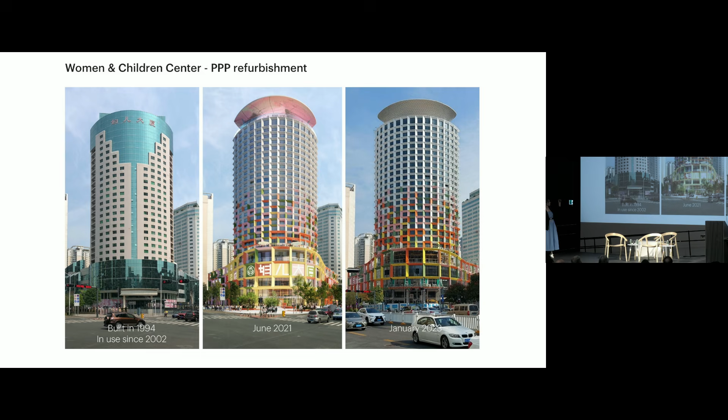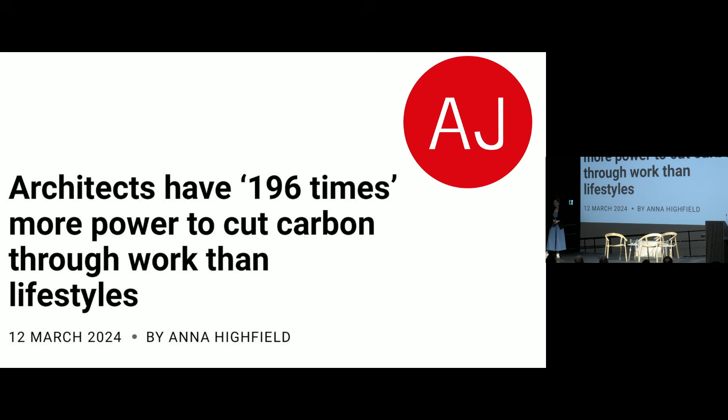It shows that renovation and transformation can be beautiful, but also that retaining the concrete structure of this building instead of demolishing it is the carbon equivalent of 11,800 flights from Amsterdam to Shenzhen. So this is where the real impact lies. That's why architects can have 196 times more impact to cut carbon through work than through lifestyle, according to the Architects' Journal. So we can really have an impact together.

You can also not build in cities. This is a former parking garage of an old shopping mall in Tainan, Taiwan, and we transformed that into this urban oasis. It shows that these things can scale to an urban level.

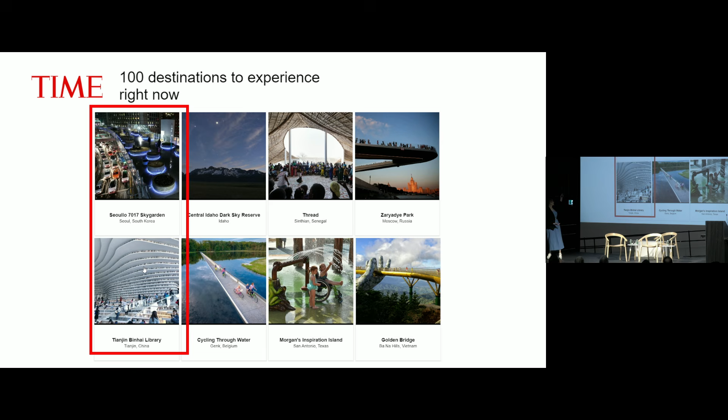Here we have a flyover in Seoul, South Korea. This was a flyover for traffic, but it was not able to support the traffic anymore, so we turned it into a high line with all the plant species of South Korea. What's wonderful is it shows that placemaking can have value. The investment was 30 million euros, and the increase in real estate value around it was 200 million euros, so next time I would ask these guys to pay for it. This also made Time magazine as a place to experience. So sustainability, done smartly, can be a destination in itself.

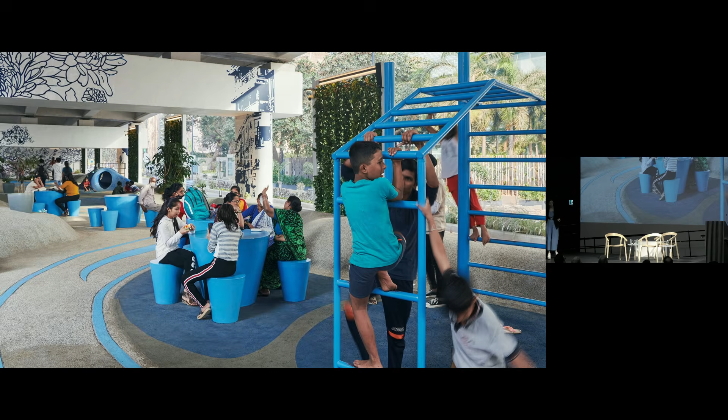Then we got a call from the governor of Bangkok who said, hey, I also have these things, can you do something for me as well?

That's when we set up an AI installation in Bangkok, and we were consulting the community, asking them what their hopes and wishes and dreams are for their spaces underneath flyovers. So this is how we use AI, not to generate images, but to work with communities, learn together, and understand each other. This was a complete hit, and the governor of Bangkok was happy.

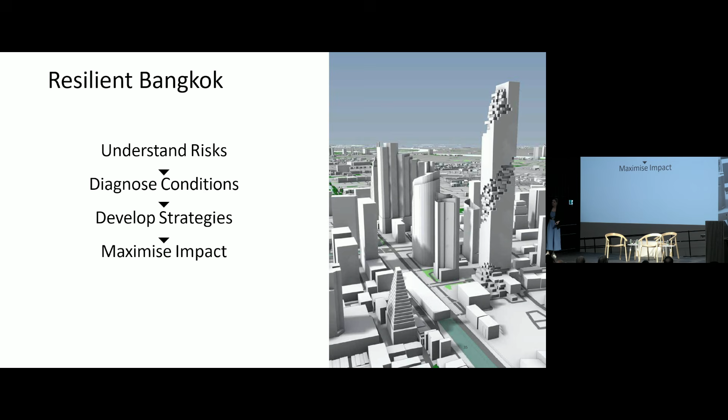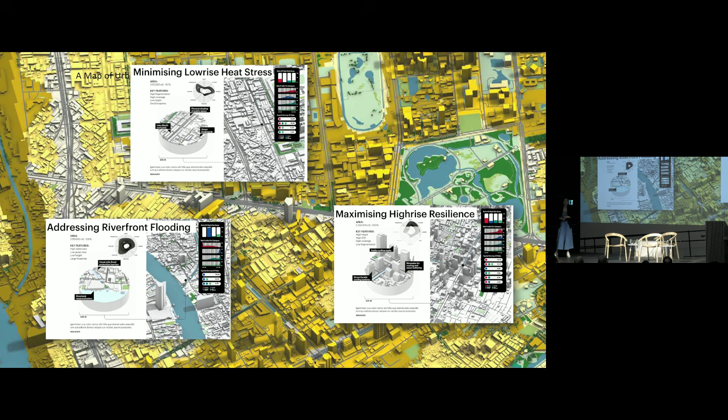So how do these things scale further? We're now working with the city of Bangkok, with their digital twin, on understanding flood risks and resiliency. We were able to create a common language for carbon, and our next step is to create a common language for resiliency, with an analytical stack where we can look at the risks, the runoffs, the distance to green, heat risk index, but for the first time also link that to urban form - what kind of urban forms do we find, the high rises, the low rises, the riverfronts, and what is most likely to happen where. And this prediction of risk is something we now do with other cities too.

For the city of Rotterdam, we are doing a project also based on digital twins and the data maps of the city, using all of the city's rooftops together. We developed a tool and a method to assess all of the city's roofs - what are they suitable for, what can we use them for, how much energy can we generate, how much green can we add, how many square meters of housing can we add to the stock supply.

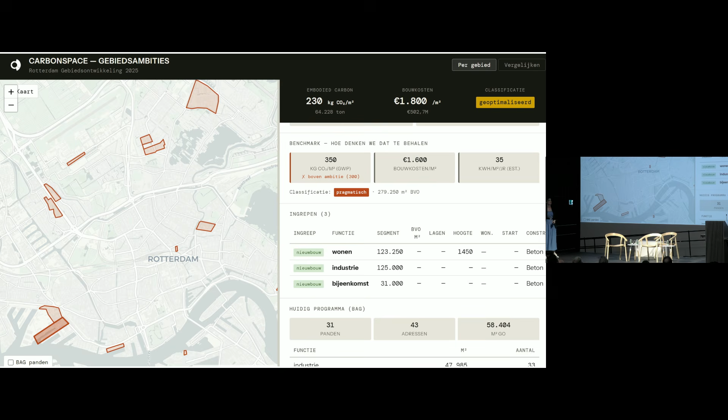This started as a small project and it has now scaled up to 6 sister cities, and within Europe we have a €6.5 million subsidy from the EU. These things scale, and I find that super exciting to see. We're also now becoming the carbon consultants of the city of Rotterdam. So if there's anyone from the city of Toronto here, talk to me, because we can do these things together, and this is super exciting. It shows that you can do this carbon budgeting on a city scale level.

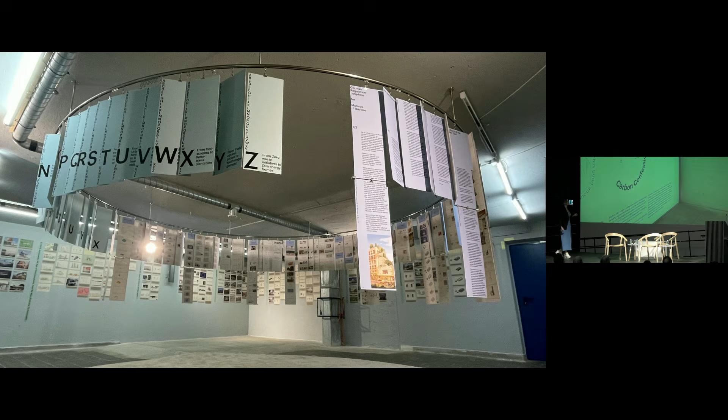We are sharing our insights and learnings with a traveling exhibition showing our learnings, our trials, tribulations, things that work, things that don't work. We started in Munich, went to Paris - this is the Paris show - we were in Taiwan for a brief while, and this was the Rotterdam version. It got a lot of attention that people are sharing their insights, but also sharing the things that don't work. This radical honesty got a lot of attention. We even made it to the 8 o'clock news, which was super cool to see.

What I think is most interesting is that we had the world's first carbon election debate during this exhibition, where political parties were defending their climate agendas. And that brings us back to here now, Toronto, green standard - I love it. But I also understand that it's quite challenging at the moment politically.

I'm just fascinated by the fact that you have this tier system that says tier 350 kilos. But what does that mean? If you're an architect, you have to design something below 350 kilos for your skin and structure. I ask a lot of people, do you know what that means, how do you design with that? Out of curiosity, I did a deep dive into our carbon city, and I found that we have 7 buildings that meet the Toronto Green Standard. So just curious to have a look at those.

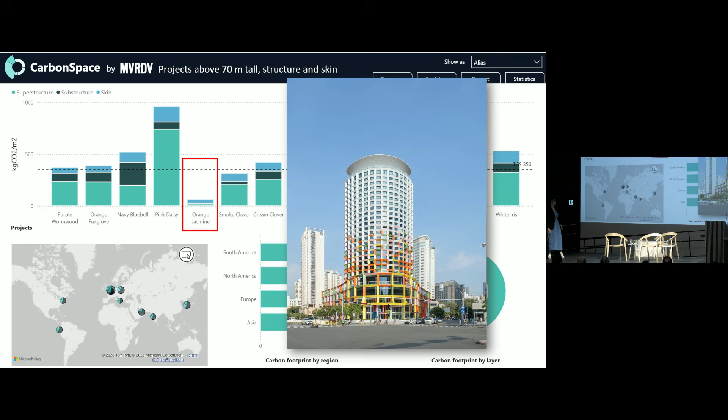Obviously this transformation is TGS proof. Also this mass timber tower is TGS proof, but you can't do mass timber towers everywhere - we typically don't have the budget for those. Also the timber hybrids are TGS proof.

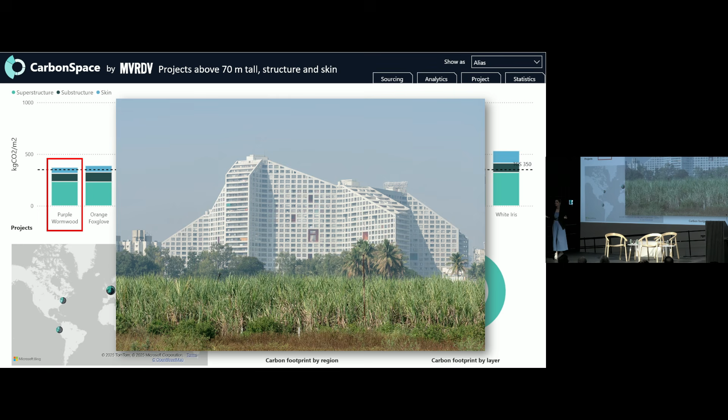This was my biggest surprise - I didn't believe it, I triple-checked this, but this mega building in India, 1,000 units, is also Toronto Green Standard proof. How is that possible? Such a big building so low in carbon. It's in India, it has relatively thin floors, small spans, the facade is only 10 centimeters of concrete with paint, no cladding. But the biggest thing is it has 9 slabs with only 4 cores, so it's efficient in its operations too. The biggest trick is that this is sitting on bedrock, so it has no foundation, just a light footing. This is something I'd love for us to congratulate ourselves with, but we can't - this is just context.

And this shows that carbon doesn't have a face. Carbon is very dependent on where you're building, what you're building. And that's why we're using this to steer away from discussions about whether something is good or bad, and rather to see where it is in the world, what the context is, what the conditions are, and how we can see what works where and what makes sense.

We use all of this information to steer on our climate goals. We're on a weight loss journey. We need to lose 3 kilos of carbon per month for the coming 4 years to achieve our climate goals. We don't know if we're going to make it. We're honest about it, but we hope. And at least we know where to look and how to steer.

This is very exciting, and I'm happy to share that we talk about this worldwide. Through this, we actually came in touch with the CVU, the Council on Vertical Urbanism. This is the world's largest high-rise organization, and these guys are actually here. We became their executive sustainability partner, so we're now collaborating with the CVU on what I think is an extremely interesting project: can we get insights into the behavior of tall buildings worldwide?

We've started that project now, asking developers and engineers to share their data with us. This is wild, because our industry is driven by competition, secrecy, and proprietary tools and data. Asking very big developers and engineers to share their data, and the fact that they are interested and willing to do that, is really a tipping point in our entire culture of collaboration.

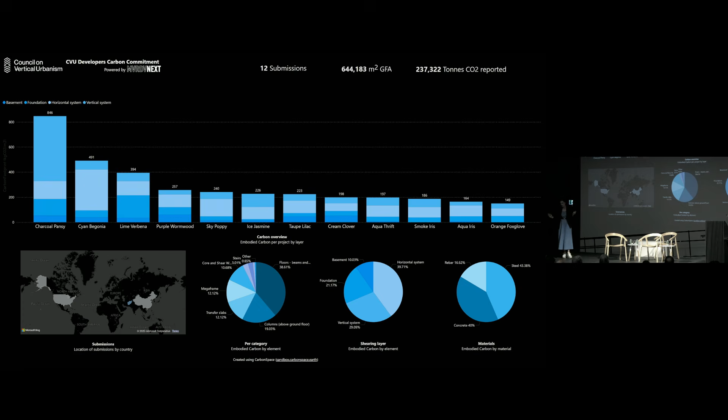So very exciting, we've started the data acquisition process, and well, this is 12 projects. This shows we definitely need more data to say anything meaningful about this. So we're on our way, and together with Will and CVU, taking a next step in scaling impact and understanding how, as an industry, we can be better and understand what works, but specifically what doesn't work, and how we can address that, with the ultimate goal to create a global carbon community of openness, sharing, and learning together. And with that, I've reached the end of my talk.

And I would like to invite Alex to the stage for moderating this, and Nathalie.

Maybe you and I will fix the stage configuration. Yeah, where shall you sit? Yeah, so that got a bit out of hand. This question to Sanne. Yeah, you want to? Yeah, okay. Yeah, okay, good. Thank you. Everybody's still here. Everybody's still here? Yeah, but they have to. Yeah, have to. We should have said no points until you use the tool first. Oh yeah, can we still change that? Have some discussions with the OAA.